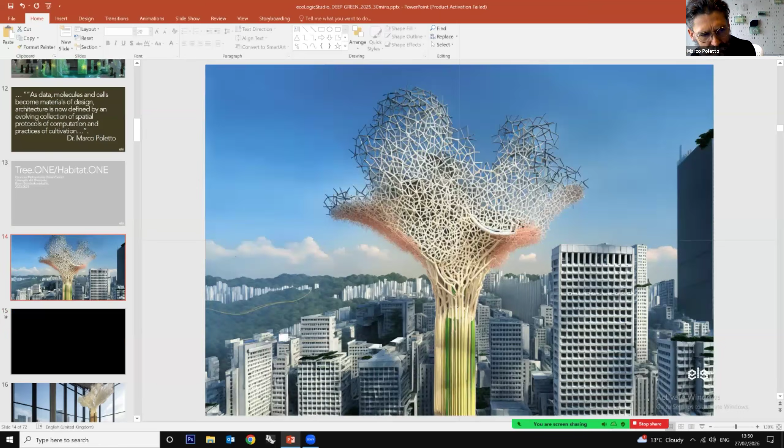We are no longer thinking about the realm of nature and biology as separate from the realm of architecture, design, and digital technologies.

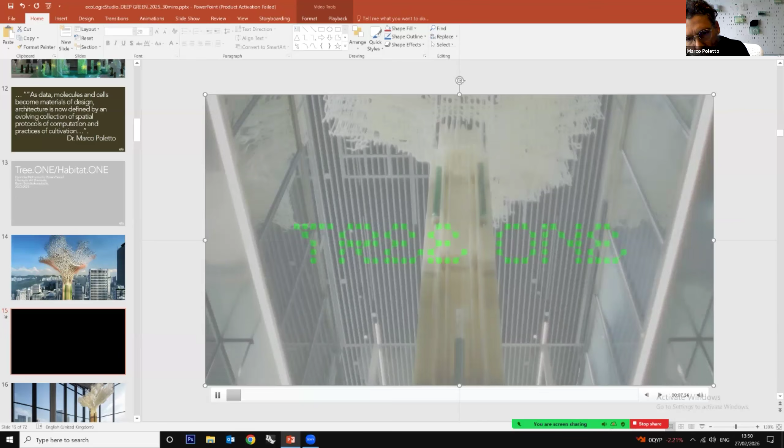One of the most significant aspects of contemporary technological evolution is its inevitable convergence with living nature. Tree ONE celebrates this epochal transition. On one hand, it is a living tree, our most potent symbol of nature. On the other, it embodies a new kind of technological life, designed by artificial intelligence and biodigitally grown.

Tree ONE has the same photosynthetic and carbon-capturing potential of a small forest. It metabolizes and stores carbon molecules into its 3D printed bioplastic structure while releasing oxygen into the atmosphere.

Its main structure is a 3D voxel grid developed by a trained AI algorithm whose recognition of arboreal systems negotiates the logic of the architectural column, the new archetype of Habitat.ONE.

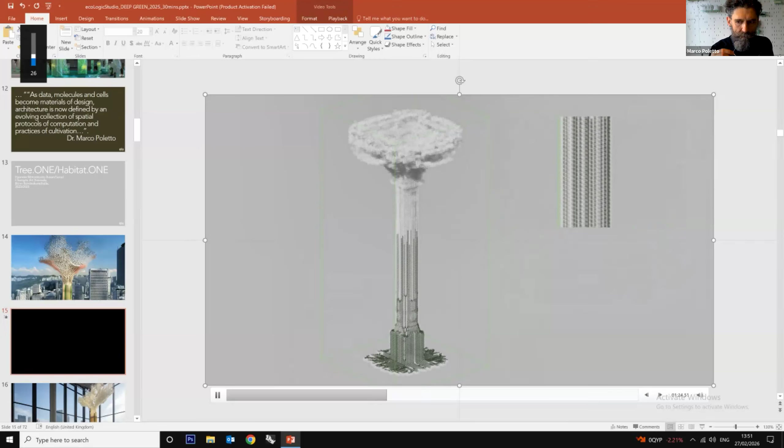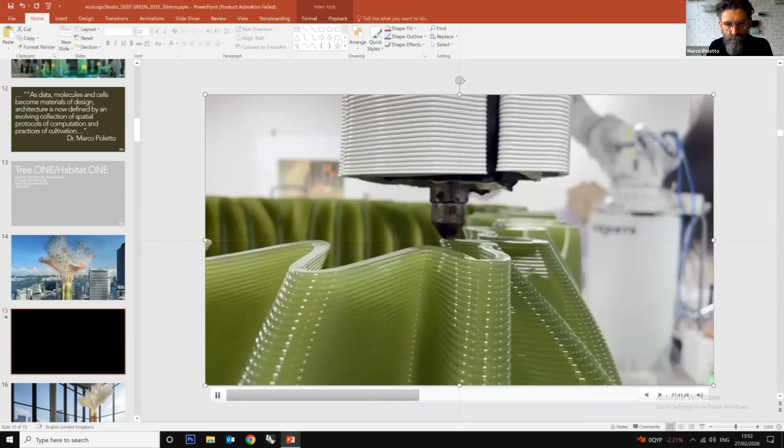The trunk and canopy are robotically 3D printed with algae-based biopolymers derived from the harvest of the same living photosynthetic microalgae cultures that grow within its 42 glass reactors. The mechanical strength of its biodegradable structure is derived entirely from its unique pleated morphology, inspired by the fibrous trunks of actual trees.

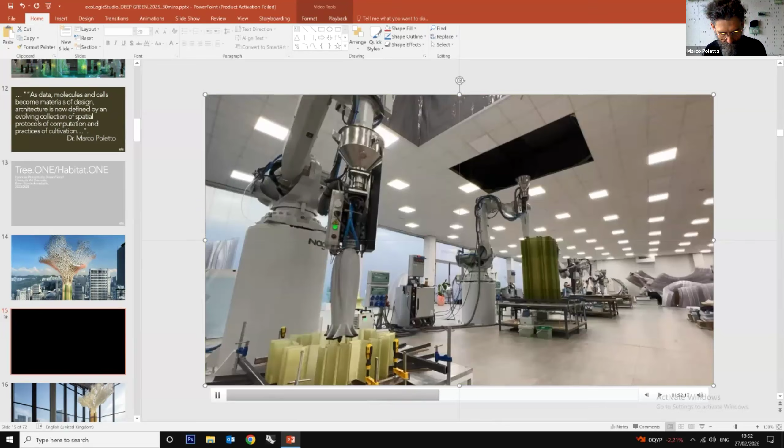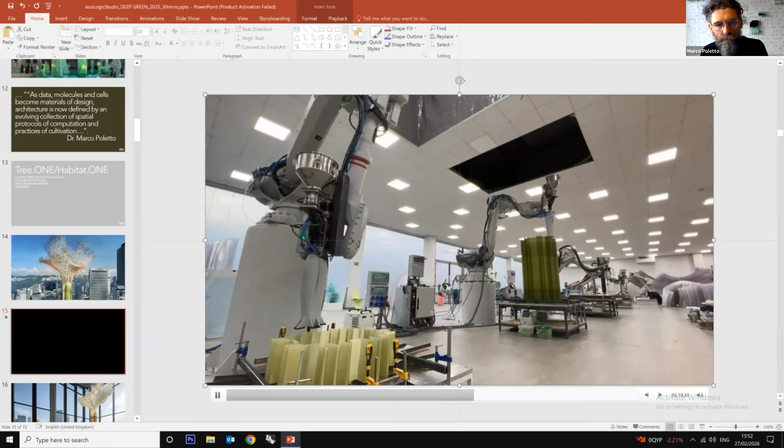The production of Tree One as a carbon-neutral and zero-waste structure required the setting up of a global informational system capable of running a remote fabrication process involving 4 industrial robots and 20 large-scale 3D printing machines. Moreover, custom software and hardware was developed to adjust the morphology and the printing process in order to eliminate the need for support material, as well as to accommodate the material properties of algae-based biodegradable polymers.

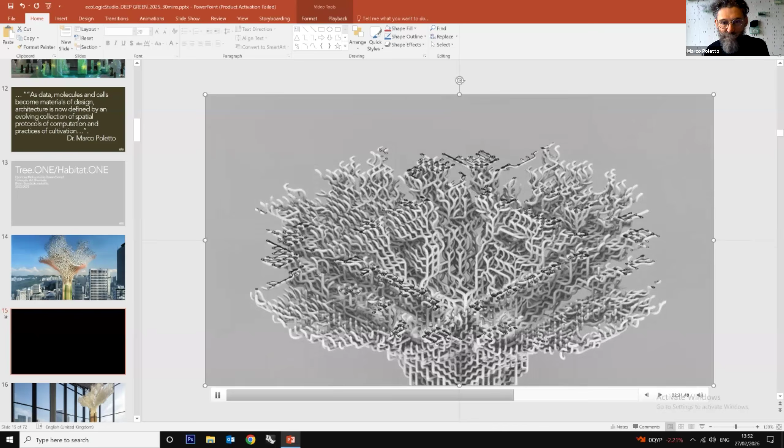This process demonstrates how digital and automation technology can be used to manufacture bioarchitectural components. Tree One is the testimony of the dawn of a new technological era where the contemporary digital and robotic infrastructure is repurposed to fabricate, or grow, soft, wet, living biodigital products. The Age of Habitat 1.

So we come to believe and consider that a synthetically designed and grown tree is not qualitatively different from a natural, biological tree. In the end, they both are photosynthetically active. In this case, the photosynthesis is provided by microalgae. They are both made of compostable, biodegradable material of biological origin. Only this one is 3D printed. And in a way, they are both generated in terms of their morphology. Only this one is created by code.

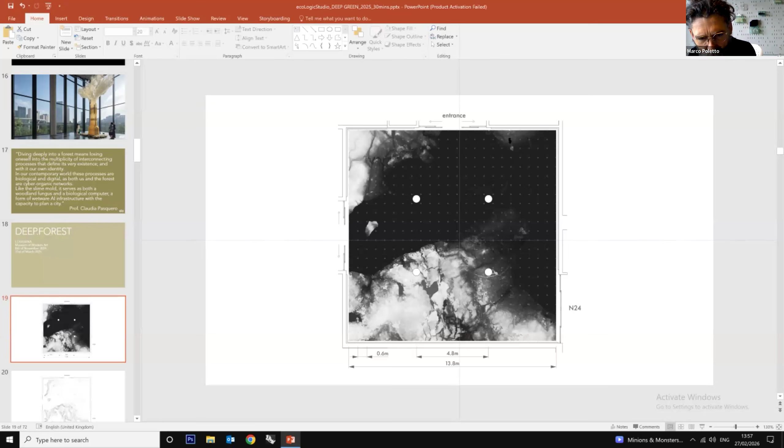So the museum asked us to present our paradigm of architecture to the audience of Copenhagen. And in the end, they gave us a room, a space that we were able to turn into an immersive environment, into an immersive experience. So we started from a kind of zoom out. So the plan of the room, the plan of the space of the museum became effectively the kind of regional map of the territory surrounding the museum itself, the center of the room being the location of the museum.

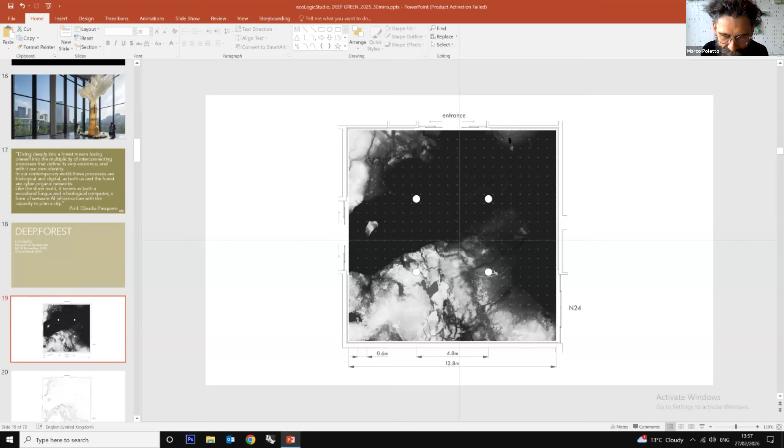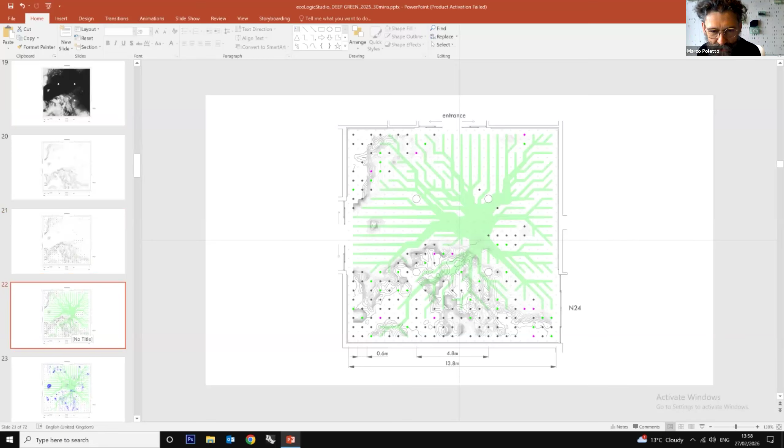And so that gave us the possibility to start playing with a generative process that really treated this indoor space as a landscape or as a forest itself, where contour lines and different material properties of the ground that we were able to analyze and extract from the satellite were turned into the spatial characteristics of the space itself, including this mycelium-inspired network that would grow on the ground of the room, and these little islands that begin to populate the space and host the different projects and work.

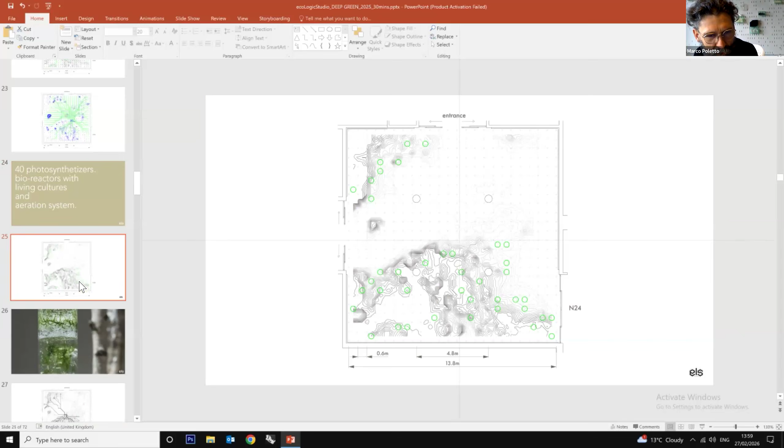Ultimately, the forest was really not only a metaphor here, but we tried to recreate this kind of circular process of growth but also of dissolution, deconstruction and decomposition that you find in real forests, and define the space as such. And so we started by introducing 40 photosynthesizers or bioreactors with living cultures that would essentially grow biomass and produce oxygen in the room itself.

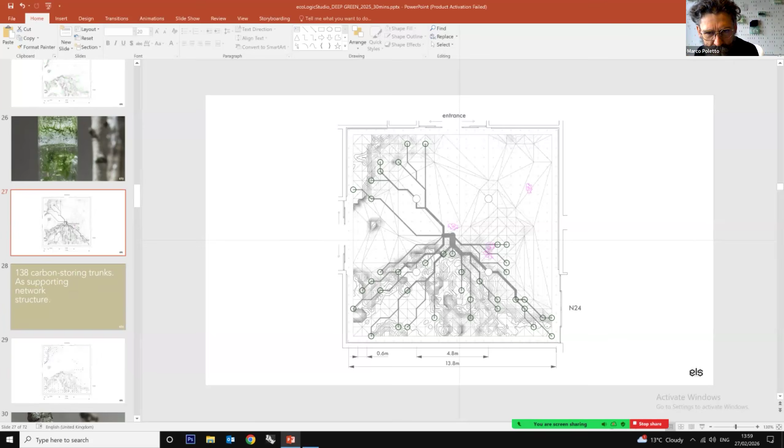And they were connected by an aeration system that would bring, let's say, dirty air rich in CO2 from the room, from the exhale of visitors, and pump it into the reactors to feed the algae, which in turn would generate oxygen for visitors to breathe. And that was actually happening in real time for the whole period of more than 6 months which the exhibition lasted. We also had 138 carbon storing trunks.

These were actually supporting network structures of real tree trunks that we salvaged from the woodlands surrounding the museum itself. I don't know if you are familiar with Louisiana; it stands in a beautiful setting just outside Copenhagen, so it's rich in woodland life around it. So we brought them in and integrated them with a series of digitized and 3D printed versions of these trees, also made with algae biomass.

So the biomass that we were growing in the reactor all of a sudden was becoming the scaffolding for these synthetic trees. And these then were made to host mycelium cultures like fungi that would grow and essentially feed on the biomass itself for the period of the exhibition. So in 6 months, you started to see these synthetic trunks transforming with the white pattern typical of the mycelium growing within the brown substratum, which in this case was spent coffee grounds. So essentially waste material that became nutritious substratum for the cultures.

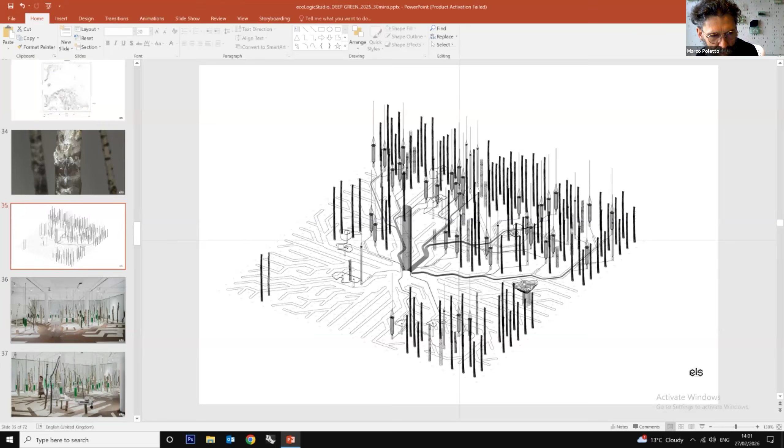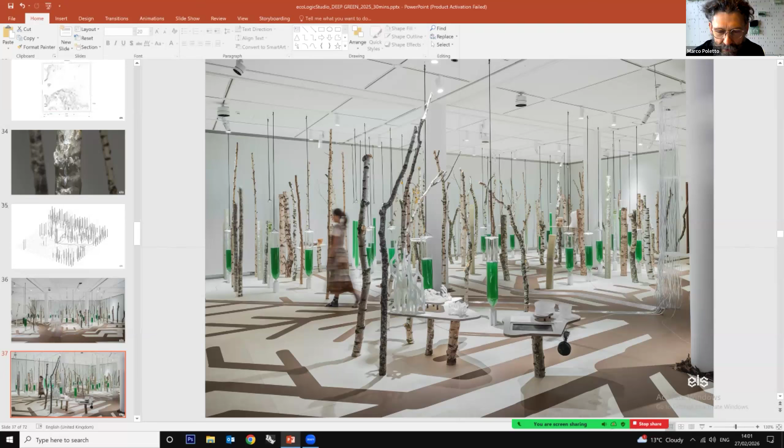And again, this whole material logic was organized following the maps that we saw at the beginning to create quite literally a synthetic forest within the gallery space, which visitors were able to venture in. And this is the overall effect, something in between a laboratory and an actual forest, with the floor providing the aeration system to the whole installation, while also guiding visitors along the paths where different contents and projects were exhibited. So you could just sit on the ground, listen to videos and look at the models, while also experiencing the effect of being lost in this immersive space.

And we then also began to wonder whether this kind of spatial logic could effectively become a way of designing interior spaces that could be used. And so this evolved into a second, smaller exhibition that was presented in the Triennale in Milano, and just closed actually a month ago. So until very recently, it was exhibited in Milano.

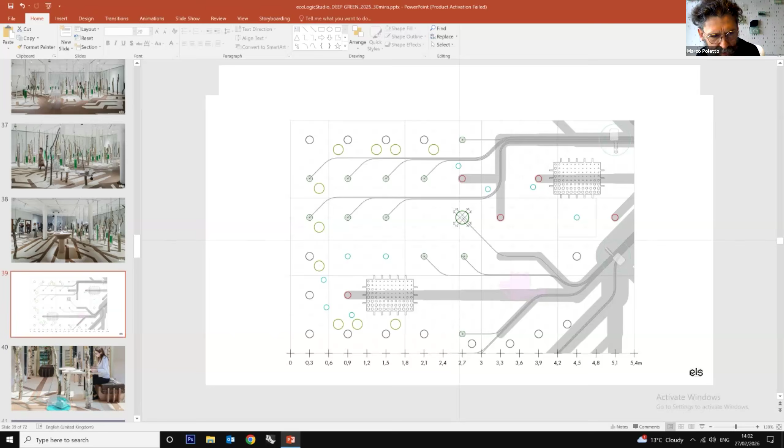And this was presenting the same logic, but in a more compact form, as a kind of room where you could study and spend your time, and where the walls of the room were substituted by this filtering tree-like system, again integrating oxygen-producing cultures of algae and living mycelium degraders.

And so again, you're very much using the space, but also you are kind of contributing to its own metabolism, and in turn, your walls, your room, your elements surrounding you contribute to yourself. And so it becomes a sort of new symbiosis, if you want, where the boundaries are very much inseparable.

And of course, as you can see, all of these projects, despite being, let's say, speculative in nature, they are also for us a very important platform that we can use to test design techniques and design details and develop real prototypes, real material systems that we can then apply in our built projects. So they are not really meant to be metaphorical as such. In our case, they are test beds for a new kind of architecture to come.

So again, the topic of radical sustainability for us emerges really where algae grow beside algorithms, and prototypes become civic experiments, in a continuous rehearsal of cohabitation with the more-than-human world. In this ecology of design intelligence, creativity is the art of learning to think, build, and evolve with synthetic life itself. So it's really not about definitions for us, but it's about the actual processes that we are able to set in motion and that we become part of inevitably.

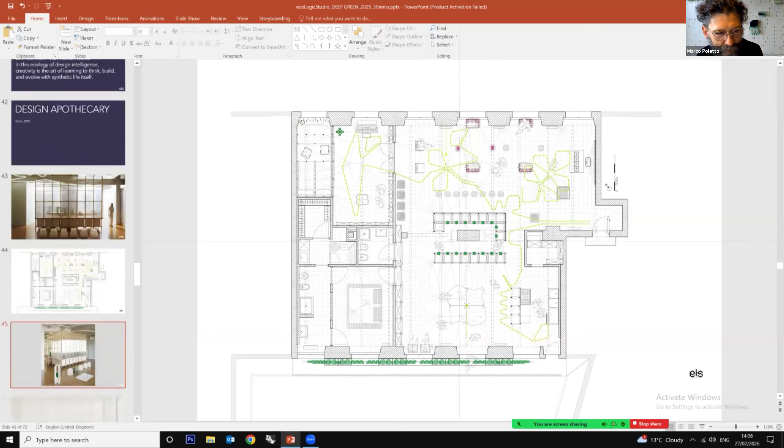This is the plan drawing, and what you can see very clearly is that at the center of it there is a quite prominent set of green dots, which are of course our algae reactors. And so there is an algae farm that is really the core of the house, right? So that's where the whole metabolic process of the apothecary starts. And so you can see it here photographed from the back.

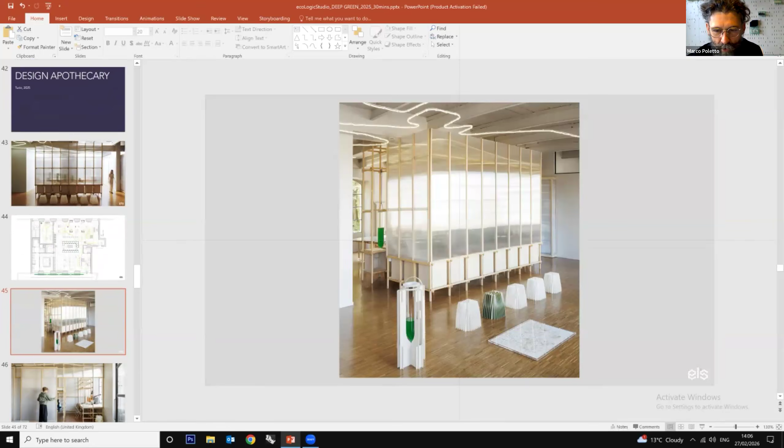And this is the more flexible part of the space that we use also for exhibitions or for workshops. And then there are some more private areas, which are also flexible and can be used in different ways. These are obviously our two kids. I wouldn't say kids anymore, to be honest. They are our teenager son and daughter, and they are very much part of this, in terms of how they contribute daily to the practices that are taking place in the space when we are there.

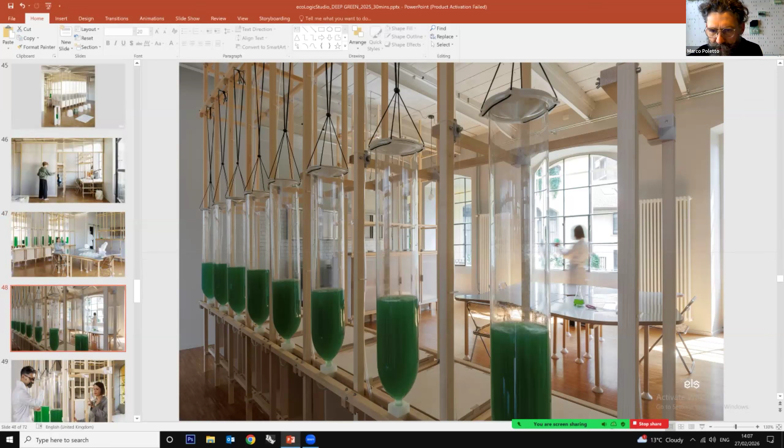And so the area of what could be a dining room or kitchen quickly transforms into a lab when it's necessary, and again opens up directly onto the cultivation and the algae reactors. And I'm sure you can see in these projects that there are elements that were present in some of the exhibitions you saw before, such as the reactors or 3D printing detailing. But of course, here they have become a fully developed and engineered building system.

And so we tried very much to maintain that kind of crafty feel. They are all reversible. There is no glue, no screw. You can dismantle, separate all the material. Everything can be moved and reused. But at the same time, of course, they are also functional to the point in which we can use them every day and consistently for a long period of time. So they are actually very much now what we call a new system of architecture, the photosynthetic system.

And here there is another image of the main exhibition space. So this type of development obviously gave us the opportunity to really begin to develop this type of photosynthetic architecture in a series of projects that we did in collaboration with several companies, which became connected to us as clients, but I would say also as co-creators and co-developers in many cases.

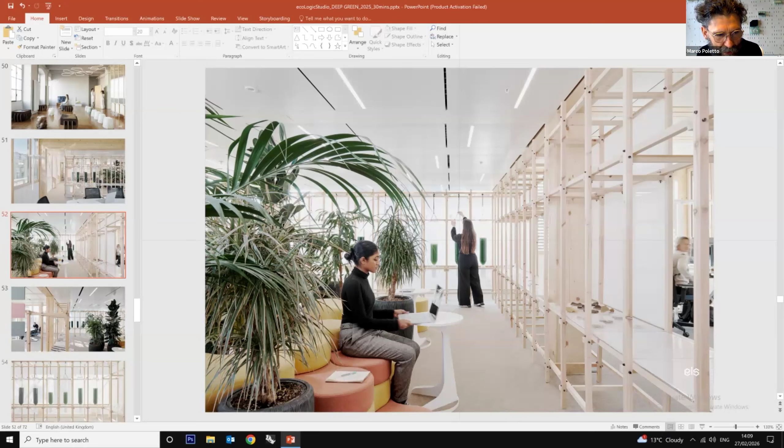So this is, for example, the Air Garden in the Haleon headquarters in Nyon in Switzerland, where we quite literally built a similar algae farm room right in the center of the office space, so that from your desk you can look inside into this kind of interior garden. You can also go inside of it to work or chat and relax, and at the same time the algae are providing this continuous purification as well, and a sort of bubbling sound that relaxes and brings the feeling of living nature in the office space.

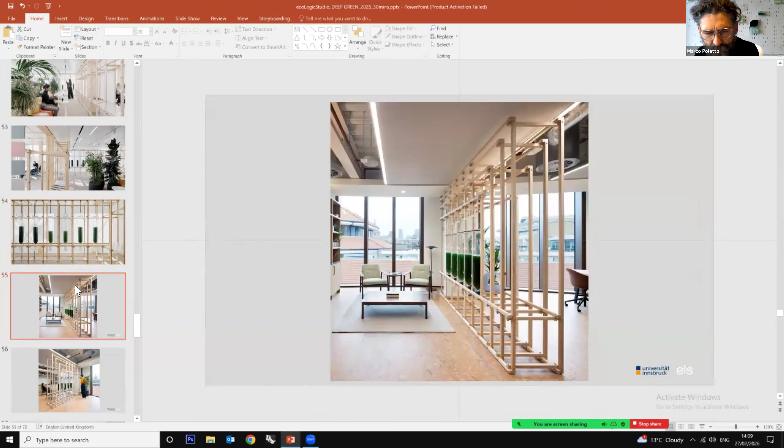The material system is very similar. The reactors themselves are patented, and they are our own design innovation element, whereas the timber structure is a very simple lattice, which can be developed in different ways. Here, for example, you see another version of the air garden in their London headquarters. You see perhaps St. Paul's in the background there.

It's on Bankside. And here the timber is a little bit more precious. It's been treated a little bit more carefully in terms of the realization. It's a bit more high-end, but the system is the same, and the whole logic of reversibility, craftsmanship, and of course the biotechnological core, the active core is there, sitting comfortably in what is now a very much used day-to-day office environment.

So for me, these images are very exciting, not just because we are happy that people are now enjoying this type of biophilic approach to design, but also because it shows that this is no longer the future. It's something that can be enjoyed now, and most importantly, it is not just about having it there as an object in the background, but it's really about transforming spaces into communal areas of co-creation. Oftentimes the staff and the employees of these companies are involved in the process itself of harvesting, maintaining, in some cases even consuming the nutritious biomass that can be grown in the reactor.

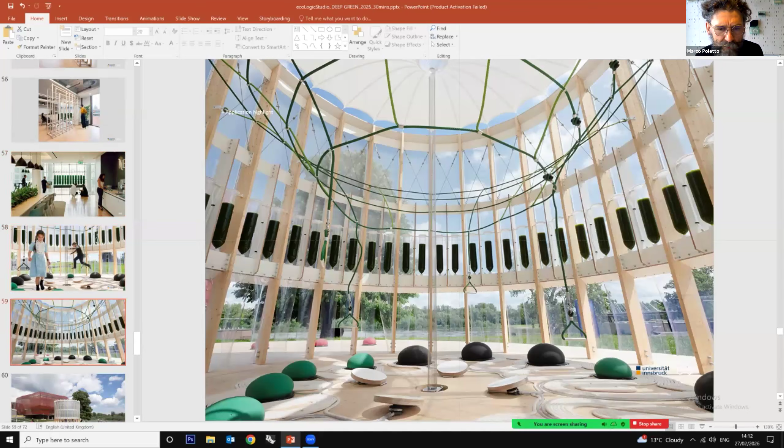And from interiors, we moved to the exterior environment. This is a project that was very dear to us. You may recognize again Giacomo and Lulu, a few years younger. And this was really just as we came out of the lockdown in 2021. We were able to complete this first playground, the air bubble, the first biotechnological playground in Warsaw, in Poland, which really demonstrated the possibility to use this type of technology to create playful spaces where the quality of the air is drastically improved from the urban environment as we are used to.

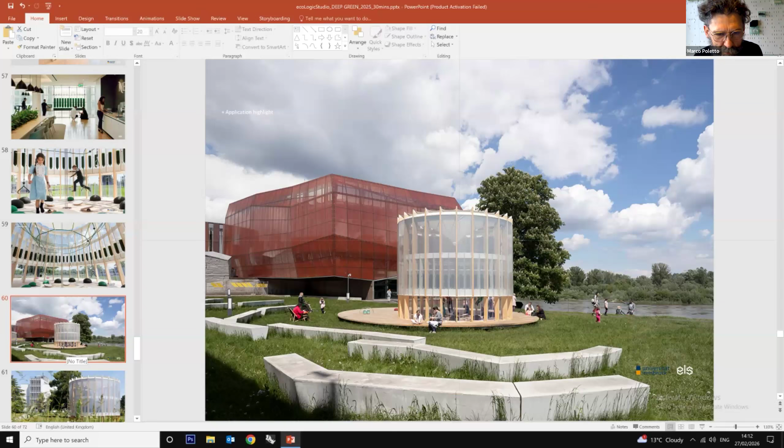Again, microalgae literally feed on nitrogens, on carbon monoxide, dioxide. So they are essentially treating what for us is pollutant, is dangerous for our health, as food. And that's the beauty of this idea of symbiosis with the modern human. It's not just a philosophical idea, it's an actual fact of life. These organisms are quite literally symbiotically exchanging with us on a daily basis. They feed on what we emit, and they emit what we feed on.

And finally, before I conclude, I want to show you the last step of this process, which is now taking us to trying to create a first product collection which really embodies this ethos of circularity and biodigital. We call it Photosynthetica Gardening Collection. It is essentially a collection of gardening products. And the first one, of course, is our hero product, as we like to call it, the air reactor, which is essentially the first desktop photobioreactor. There is nothing like that on the market.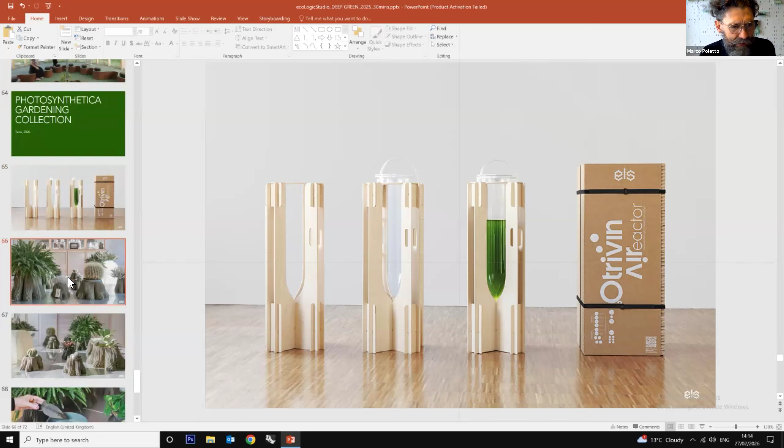And this has been now followed by a series of other products. These are called herb pots. They are essentially planters, which are 3D printed with compostable polymers. These are algae-based polymers; 30% of the biomass is algae-based. So they have these beautiful fibrous textures. They really feel a bit like bark, and their design is, of course, reminiscent of the bark of a tree.

And they can host just simple normal pots, but kind of transform them into little sculptural objects where, again, you kind of lose a little bit the distinction between the plant and the vase or the pot, and again, what's natural, what's synthetic. And so that's also a little bit the game that we're trying to play here in kind of blurring once again the boundaries. And we made also special tools that are all compostable and that you can use to plant, to do essentially just the regular gardening activities.

And finally, we are now bringing to life a bigger version, which is kind of made of components. It can be used for larger plants or even outdoors to protect and to interact with existing trees in parks, in urban parks. And once again, providing this sort of interesting blurring of the line between what is actually biological and what is actually man-made.

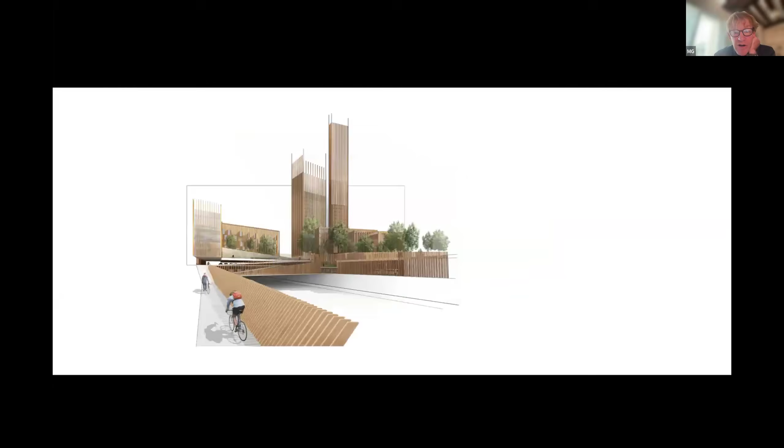I mentioned mass timber. Cross-laminated timber is a very popular conversation now worldwide in architecture. These are very large scale panels of glued together wood products, cross-laminated, and there are other formats that make up a family of products we call mass timber. It allows us to build on a very different scale than we ever did before, and in a very competitive way against materials like steel and concrete.

I'm here in Paris. I first introduced this idea about 15 years ago here in Paris with this proposed project that didn't happen, but it was a 35-story tall wood building.

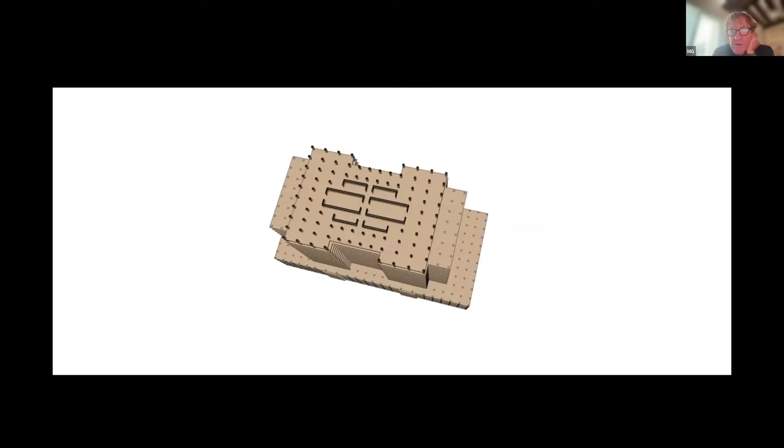The reason I show this is that we needed to learn ways, in the early days, 15 or almost 20 years ago when I first wrote the concept of how to build these tall wood buildings, to find tools to describe to the public why this was not only a good way to build from an environmental point of view, but a safe way to build both structurally and for fire, and all the obvious questions we get when presenting the idea of building big buildings. But structurally, what we were able to show is that the Empire State Building could have been built entirely in timber, and we did a full engineering exercise to prove this is possible.

The Empire State Building, at 102 stories tall, revolutionized a lot of the conversation globally about tall buildings. And we knew if we could start to show and use these tools to communicate with the general public, we could communicate the power and capacity of natural products, and wood specifically, to do great things, which has been the mission of my firm.

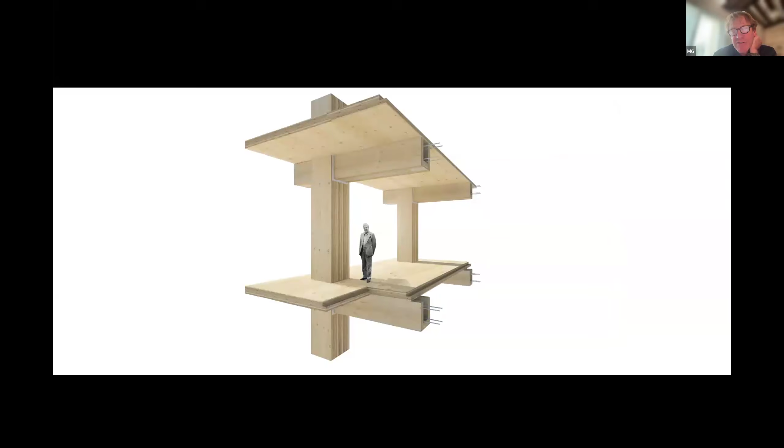So we do a lot of this research, innovation, and communication work, because it is not enough just to dabble in change. We need to promote change very quickly.

I have to admit that 10, 15 years ago, when I was first talking a lot about this publicly, the attitude within the architecture profession was that that will never happen. There's strangely, in the design professions, a paradox where we follow rules, we sit within the building code, within zoning regulations and all kinds of regulations, that sometimes make us forget we actually have the power to be the change agents across the board in every aspect of the built environment. But we have to not just sit within our practices as designers, we have to actually speak up as designers. And so there was remarkable pushback to the idea of building tall.

And yet I've just been at this conference where I was shown the first tall wood building built in Germany has already been built. The first tall wood building built in Switzerland has already been built. In Norway, in France, they were all presenting tall wood buildings that only 12 to 15 years ago were considered impossible.

This is actually the first tall wood building—it's not very tall—that we built. It was in Canada, the second one in the world. The first was built by a good friend of mine, Andrew Waugh, in the UK, which is a little shorter than this, but in neither case were they very tall.

But they allowed us to showcase that using only wood products, we could build everything from the elevator shaft to the structure, to the cladding systems, to the ceiling systems, to the fire stairs, entirely in timber. The very base of the building has concrete, of course, but after that, it's an entirely timber solution.

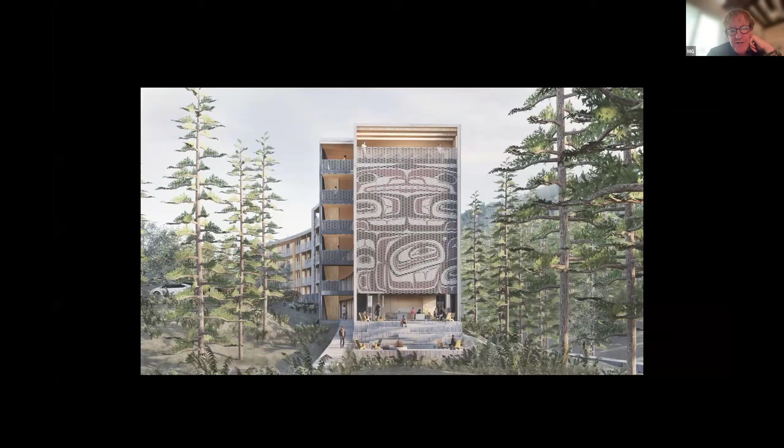So for us, this is the motivator. And since then, we've built buildings from universities like this one, housing projects in British Columbia where I live for our First Nations, for our Indigenous communities, or this project that would be prefabricated and sent far to the Canadian Arctic by boat in order to create an Inuktitut language center for the Inuit people of the Canadian Arctic.

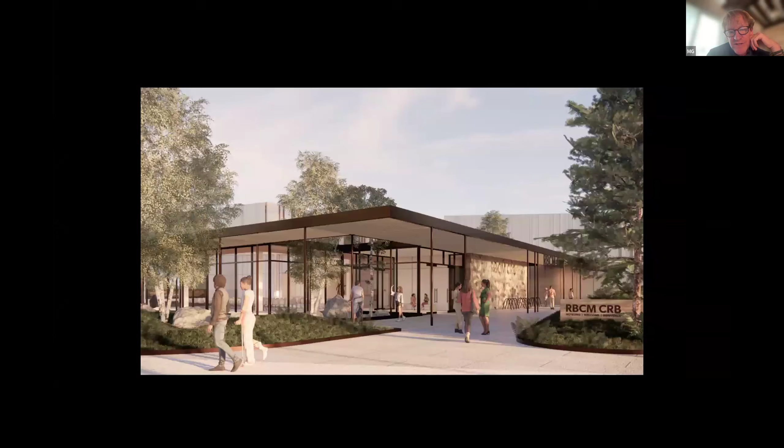Or in this case, a museum we're building right now in British Columbia, where I live, and I'll show you the inside, which is the largest mass timber cultural building built in North America so far. And it has many spaces like this. Obviously, it's still under construction, but it has many, many spaces that are built like this that are very robust, very beautiful. In this case, this is a research facility and museum. It gives you a sense of the scale and beauty of the possible spaces.

This is a city hall, and this uses a different type of mass timber. And I'm just going to flip through a couple slides. This is actually a project in Paris we're hoping will come back soon that we've been working on. Again, all in timber. All the buildings you see here will be timber in Paris.

And the last images I'm going to show you is that what we are finding is that not only is the story about what is our best choice from lowest carbon materials in our community, it's not always a transferable story depending on where you live in the world, what the lowest solution would be. So I like to remind people it's not that we can do the exact same thing everywhere and solve the problem. There is a regionalism to this. But what we've come to believe is that we need to do many things. We need to address climate change. We need to build with materials grown by the sun whenever we can.

We need to build in a more cost-effective way to reduce the cost and increase the affordability of housing for many people around the world. We need to learn how to do that, and we're doing it through prefabrication.

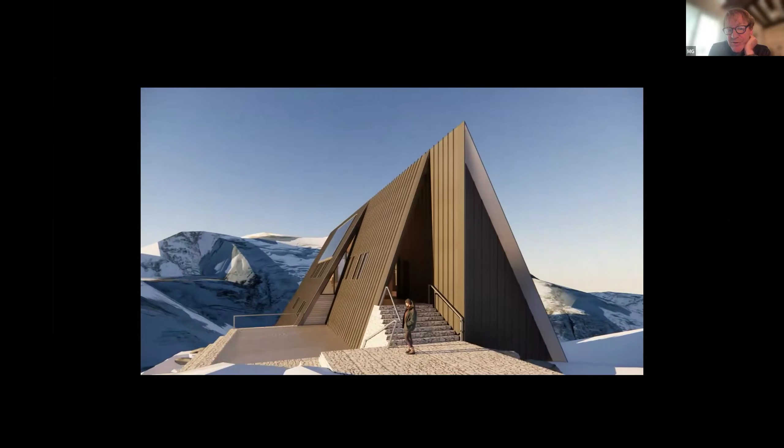So this building will be built, prefabricated, and built mostly with helicopters. Helicopters are not the most green solution, but luckily we're also designing a helicopter terminal for electric helicopters. So we're starting to see pretty great technology happen there.

But the prefabricated nature that wood allows us to do means we're actually able to build in these beautiful remote settings in a much more sustainable way than we might have just decades before, and do so in a much more cost-effective way.

I like to think that these ideas of sustainability also have great benefits across the board towards creating more livable communities with reduced stress, with a lower environmental and lower carbon footprint, and ultimately can allow us to build with new technologies in a more cost-effective way, kind of wrapping together all of the issues that we as architects need to start thinking about much more than we have been.

And with that, I think I'm going to stop sharing in a second here and start taking questions. I hope I've got my timing okay.